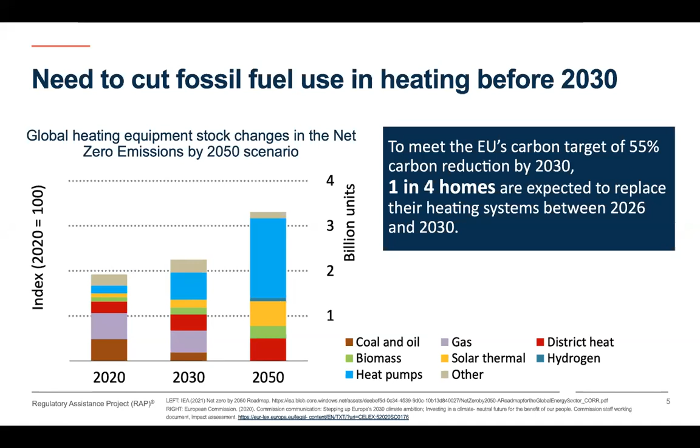Another really key statistic that caught my eye is from the European Commission's impact assessment on achieving our 2030 climate target, which is a 55% reduction. And I should say what I'm about to describe isn't a European target, but it's an indicative sort of level of effort needed to reach that target, which is that around 1 in 4 homes will have to change their heating system in this decade. So clearly this decade, actually, we're getting quite a long way into this decade, but this decade is really key for heating.

In addition to those preset targets, we obviously now more recently are experiencing this huge fossil fuel price crisis, where we've seen the cost of wholesale gas rise tenfold in 2 years. The wholesale price of gas is incredibly volatile, as we've seen now. The other fossil fuels used for heating are following with very significant price rises, not as significant as gas. And of course, with Russia's invasion of Ukraine, we're seeing the geopolitics of energy in the European region demanding a huge reduction of gas use in Europe. And remember that the residential sector is Europe's biggest single gas user. So this is another reason for this huge focus, I think, on gas use in particular, and on heating as a result of that.

And in response to both these targets and the need to move away from reliance, particularly on Russian gas, we are seeing a number of member states strengthen existing policies or introduce new policies to phase out the use of fossil fuels in heating, and probably the most dominant type is a technology phase out, so phasing out the replacement of fossil fuel boilers. And clearly these policies rely on the natural replacement cycle, the natural lifetime of the boiler, which means when you start working back, given a boiler lifetime can be anywhere from about 15 years, a bit longer for oil boilers, working back from 2045 or 2050, you can see these phase out policies, to be fully effective, need to be starting quite soon.

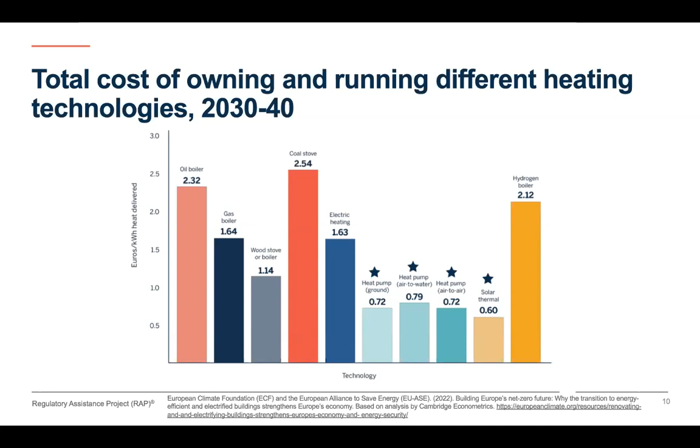Just to highlight one or other of these studies, district heating, as we know, offers not only access to lots of alternative heat sources like waste heat, like geothermal, but also this study for the European Consumer Association, BEUC, found that many technologies can deliver heat more efficiently when delivered through a district heating system as well. So district heating clearly benefits from these two things.

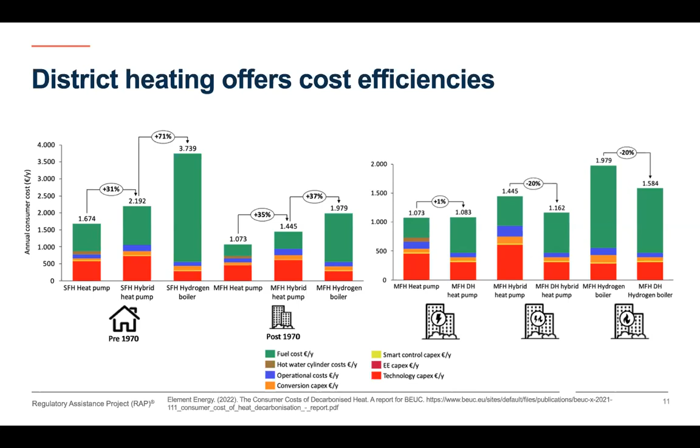Having said that, we focused in our study on heat pumps. We focused on heat pumps because, first of all, district heating won't be available to all households. Heat pumps are the individual building level solution that has been identified as most cost effective in the future. But also when we started to think about it, we realized the economics of switching from an individual system to an individual heat pump versus connecting to a district heating system were entirely different. Very simply, the upfront costs for switching from, say, a gas boiler to a heat pump are quite significant, but are also borne by the individual household.

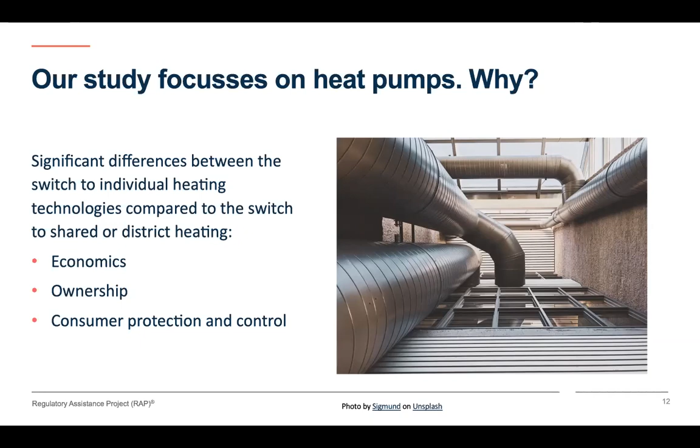Whereas actually to connect to a district heating system, the connection costs are usually much, much lower. And upfront costs are quite often rolled into the ongoing contract for heat. So the economics are clearly very, very different. The ownership structures are also very different in district heating, and we also have very different questions around consumer protection and who controls and governs the system. So really, we decided it was an entirely different paper, and so this is the focus on heat pumps.

So what are the economics of switching, and how affordable or unaffordable is it? We approached this question with quite a simple total cost of ownership assessment. So total cost of ownership, looking at not only the upfront cost of the technology, so the heat pump or the fossil fuel boiler, but then also its running costs and a few other costs like maintenance over the lifetime of that technology.

So first of all, we looked at what is already now well known as an accepted strategy for reducing upfront costs of technologies, which is to provide public subsidies. And we reviewed the availability of subsidies for clean heat across the European countries. We built very heavily on a recent study by the Öko-Institut in Germany, in which they performed a study of all 27 countries and the clean heating subsidies available.

The good news from that study is that they found 25 of 27 countries did have clean heating subsidies, which is great news, although the authors themselves did caveat that quite heavily, saying some of these subsidy programs were what they called fig leaves. So they're kind of there in body and not really spirit. So they might be quite small budgets, or budgets only available for a relatively limited time period. So really not equal to the need in the country or the demand.

What we did then, taking that survey, was to look at the suitability of those subsidy programs for access to low-income households. The first thing we did was look at the kind of generosity of the subsidy. We identified subsidy programs offering 70% of the cost of the technology or more, and those that are offering differentiated subsidy levels based on income bands, so higher subsidy for low-income households. And we found 9 countries offering these subsidies structured in this way.

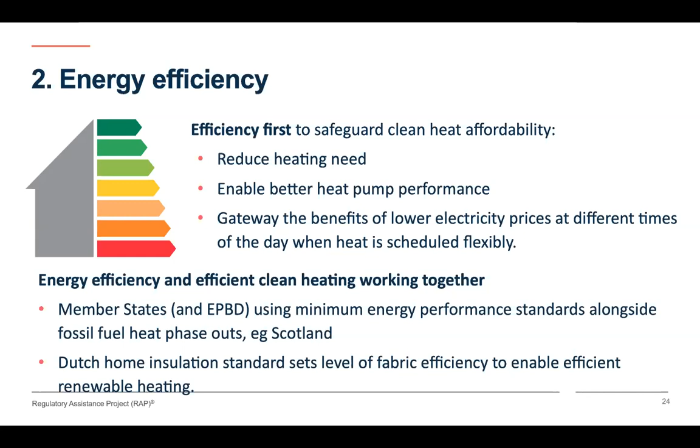A challenge I see coming is that a number of the fossil fuel boiler phase out policies in member states are not being coupled with minimum energy performance standards for homes, so minimum energy efficiency standards. So I think that could lead to higher bills than necessary and not capturing a lot of these benefits. Good news is that a number of countries are the ones to follow. Scotland, certainly, in its soon to be regulated Heat in Buildings Strategy has got a good approach. And the Dutch home insulation standard is another one that's really excellent in that it's specifically designed to ready homes to be heated efficiently with renewables. So I think this is a key area, that we need to think about energy efficiency much more hand in hand with clean heat needs.

So the third strategy is another technology-based strategy, but it's looking beyond energy efficiency to multiple building level technologies. And I must say, I was quite surprised actually in seeing these examples. There are examples I saw mainly in social housing, where they're looking at perhaps more novel technology combinations.

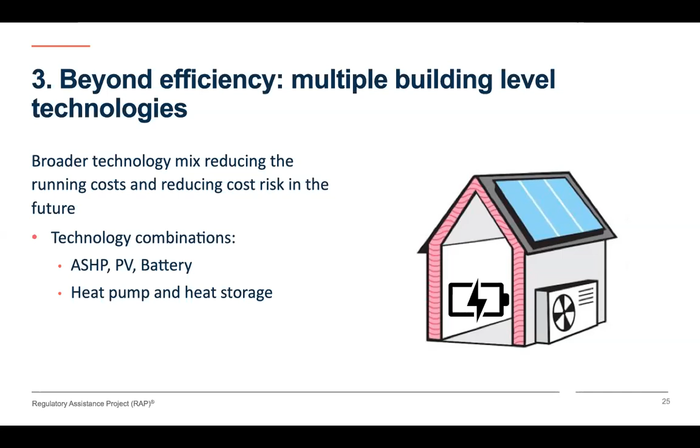And I think the golden one, the magic combination is the air source heat pump with rooftop solar and a battery. And there's in particular a program that's just released some results run in Scotland with a social housing provider that's taken exactly this approach with these three technologies, and they presented selective results, and I think these are the better end of the results, but clearly some incredible benefits, up to 90% of electricity supply coming directly from the PV or from the PV via the battery, clearly massively reducing your bill of energy needed from the grid.

I also think this is an interesting development because I think anyone that worked in buildings and renovation knows that there's a lot of nuts still to crack in getting a lot of insulation into buildings, particularly buildings that are harder to treat, so solid wall buildings with more expensive insulation needs. There's a lot of hassle factors as well.

And I do wonder whether the drastic reduction of costs in rooftop solar and the sort of relatively more plug-and-play nature of the technologies may be the reason that actually we might see a shift in focus away from insulation towards these other technologies. Whether that is a good thing or a bad thing, I don't know, but I think it's definitely a development that we should be aware of.

The fourth strategy I've already touched upon a number of times, and I would recommend this paper recently published by a colleague of mine, which is around how we access the value and therefore the bill savings in offering to the grid the flexibility of our energy use, how when we move our energy use to times of the day when clean generation is more abundant and demand is lower and grid stress is lower, then we can actually really benefit from cheaper electricity.

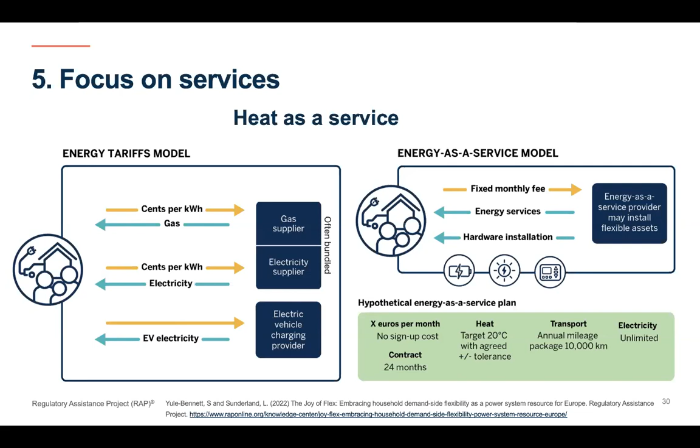So I'm sure people are familiar with heat as a service, but in general, the service provider provides the technology, invests in the technology, whether that be a heat pump or a combination of heat pump and energy efficiency and automation, building controls, and then offers a heat service contract to the householder in which heat is provided within guaranteed comfort guidelines or parameters for a fixed monthly fee.

And I have seen in a couple of places heat as a service being tried at least to benefit lower income households. And I think it does, as a concept, hold a lot of potential here. You know, it's a service and an economic model in which we can integrate both subsidies available nationally for the technologies, but also subsidies we might be getting on our bills as well, so winter fuel payments or other heating payments, into a much more efficient package.

It can overcome the bureaucratic barriers in accessing subsidies, overcome some of the complexity of the technology mixes and the interaction with electricity systems. As I've said, it reduces unexpected costs of maintenance and service, which we know are the ones that lower income households find the least able to bear. And I also think, very importantly, the service provider takes on responsibility and internalizes the importance of the performance of the heating system. And once again, the performance of heat pumps is absolutely key.

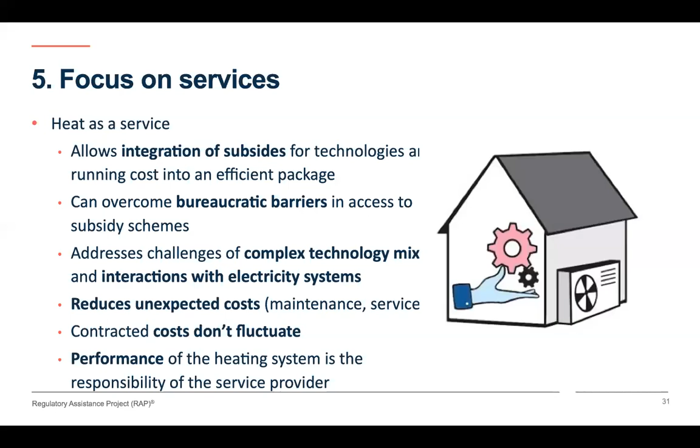The key point, I think, is there's a lot that has to happen this decade. A real refocusing of public funds, I think, cognizant of the compromises that means. If we're refocusing public funds on heating and energy efficiency and other technologies for low-income households, we are compromising other uses and other outcomes like cheap energy savings nationally, or cheap carbon savings nationally, that might be achieved with the more traditional incentive programs. I think we need to focus much more on these optimal combinations of energy efficiency with other technologies. Rebalancing energy prices, of course, we've covered that.